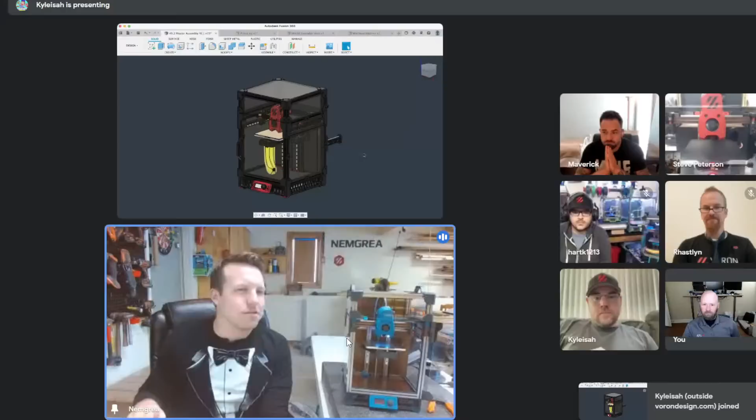The top hat is different. We moved to an extrusion-based top hat, away from the printed one. So it does use new panels, but the benefit is that they are all square, very easy to cut. Now if you want a taller top hat or a shorter top hat, you just change your extrusion size. All the printed parts are identical. You don't have to worry about trying to get someone with a large printer to print you a unibody top hat. It's rigid, and it leaves a lot of room for activities up there.

The second bit about it is that it is hinged, so it comes on and off very easily. It makes it way easier to work on the top of the tool head, or your AB drives, or doing any sort of maintenance on the top of the tool head or the top of the printer, now that it flips up and down like that.

We have some stops on the back of the hinges, so it kind of keeps it at the workable height, I guess, without bumping into your spool holder back there. And then the other kind of exciting part about the top hat is that...

When it closes, it actually locks. There's some little cam locks right here, and if you will do me the honor, I can share this little video we got going on here. That'll kind of demonstrate what happens when you lock or how to open and close the cam locks on the top hat. They're a little 90-degree turn of these printed parts. Locks and they lock onto some button head cap screws that are coming out of the bottom of the extrusions.

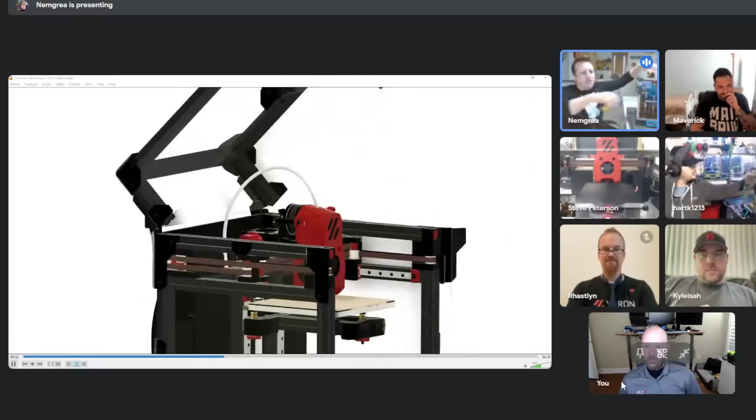Locks them on and off. You can see there the hinges on the back that have some stops built in to keep the top hat kind of up in place there.

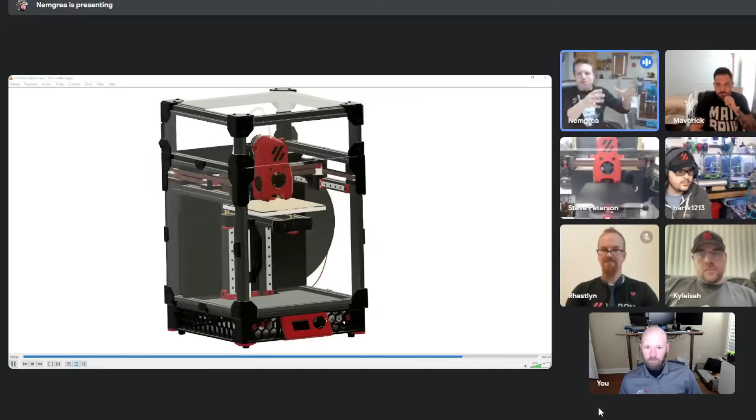That works really good. It's even just when building it to begin with, the being able to take it on and off is just infinitely better than the old solution. I know a lot of people weren't even using the screws to hold the old one on. They just keep it on and then pull it off and on as they went. Now you can do it both ways, and it works really good.

The other bit is that it does lock it down pretty good. I mean, you can give that thing a good lift, and you don't have to worry about it ripping it off or anything. It's pretty sturdy. So that's the new top hat.

Pretty okay. Let's move on, I guess, to the next bit. After the top hat, the other large update to the printer is obviously the tool head.

It's pretty large. So you can see it here. I think, Hark, you got even a large version there, so we can really get in and see all the details about it. But we'll just start with a kind of a rundown of what changed about that.

The first thing is that we've moved to the 20 millimeter pancake stepper motor. I know a lot of people are already using that. It just has better heat management than the older one, and a little bit better torque and whatnot. That wasn't always a huge issue, but beside the point, we're moving to that 20 millimeter motor.

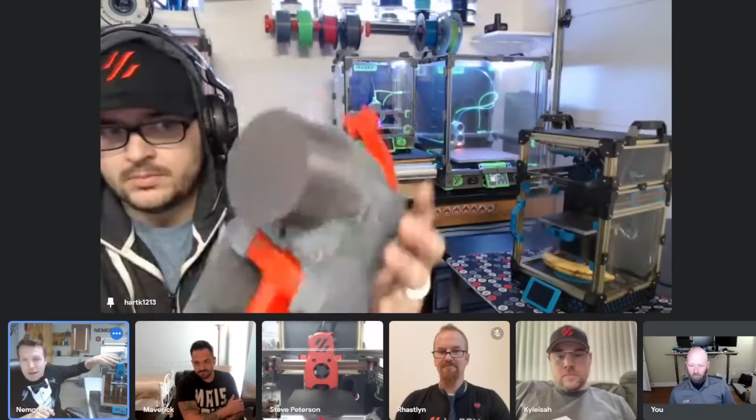We've also redone the whole filament path. This was kind of all piggybacked off of the Stealthburner upgrade. We made a lot of changes to the Stealthburner tool path. We pulled some of those ideas over into this tool head. The couple of notable ones are that the filament path is not curved anymore at the top. It just comes straight out. It makes assembly and feeding a little bit easier.

We've also opened up the hole, essentially the filament path hole that goes all the way through. I know a lot of times people would have to use that 2 millimeter drill bit, clean out the thing, before you could put your tool head together. We haven't really had to do that much anymore. We've opened that up enough to allow it to just print and be functional right away.

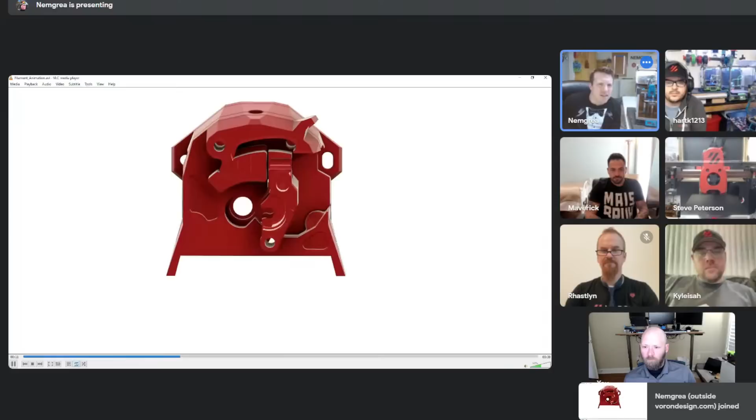I also have another little video showing that I can share here. So this should kind of give a little interior look at the filament path. So you can see it just comes straight down the hot end like that, and you can see that right where it exits, where the gears would be, there's these little extra lobes, I guess you could call them.

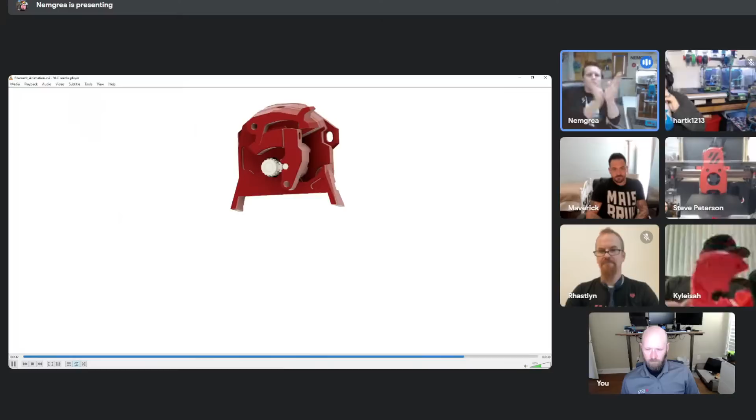That's taken straight from the Stealthburner tool head, and that basically allows you to feed the filament in a lot easier. It'll kind of, like a funnel, right? It catches it and it'll guide it right through, so you don't have to be quite as perfect with how you're trimming and cutting the end of the filament when you feed it in. It makes just filament swaps or general use of the tool head a lot easier.

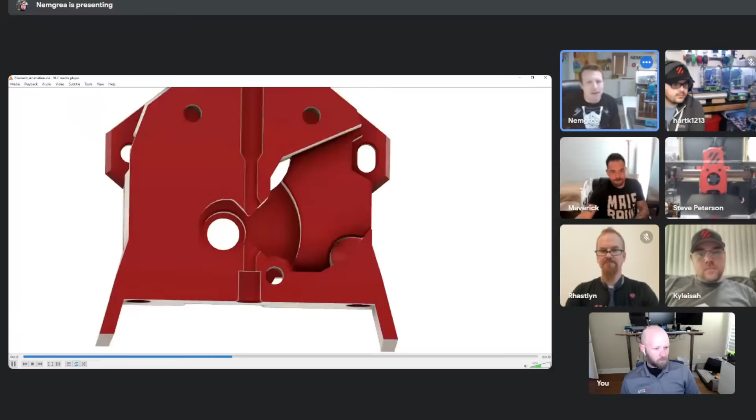The other thing you could probably see based on this animation here is that the tool head has three pieces, right? The cowling, the mid body, and then the motor plate there. I know on the mini afterburner, you kind of had this motor plate that was mounted permanently to the X carriage. And then you'd kind of have to, like, if you wanted to take your tool head off, you basically had to pull the whole clamshell thing apart, and it kind of spilled over everywhere.

You don't have to do that anymore. The whole tool head can be bolted together, taken on and off the printer using 2 bolts in the front, and one that comes in through the X carriage from the back. So those 3 bolts hold the entire tool head to the rest of the printer. Just undoing those 3, you can pull the whole thing on and off. You don't have to split it apart at all anymore.

You can keep all the internals in there together, if you need to pull it out and do maintenance, look at it, or change a fan or whatever.

We've also opened up the side of it here. There's a bigger window in the side, which allows you to actually see the gears now. You can look right in, you can see the filament path, you can see the gears that are in there. So it's really easy to look in and say, oh, my filament's not feeding right, or my gears are misaligned, or whatever. It's easy to diagnose those issues without having to essentially take the whole thing apart and understand how it's going to go back together later. You can just look at it and see, hey, I've done something wrong, or no, everything's good.

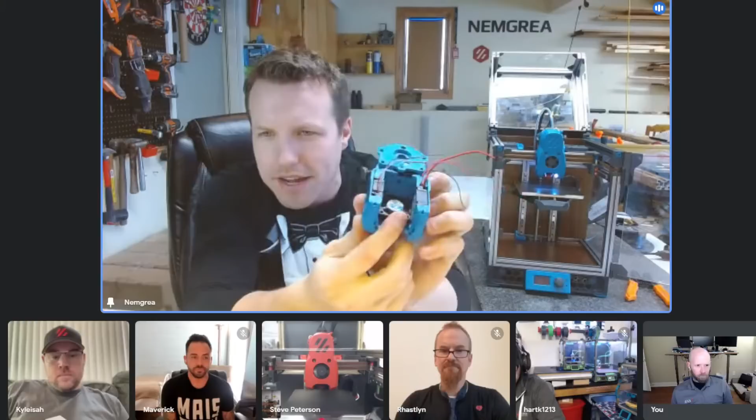So we've had really good luck with that. The other bit that goes with that 10 millimeter fan is, you'll notice here I don't have a hot end in this one, and you also might notice there's no bolt pattern in the bottom of this cowling. That's because, dissimilar to the Mini AB where each hot end used its own cowling, we've done away with that. Now all of the hot ends that we support right now use the same cowling, and instead they mount into a little mount like this. Different mount for each hot end, and then that hot end mount just slips in from the bottom, and the 2 front bolts here hold it on.

So that allows you to change your hot end out if you need to, without having to pull this whole thing apart to try and get bolts in the top. You don't have to do that anymore, it mounts right up from the bottom. It also means that the length that this PTFE tube sticks out the top is the same for every hot end. So you just have to stick it in there, measure that to height, and cut it.

And we have a tool for that. There's a whole jig, Kyle's showing it off right now. It's a nice little jig that makes all that a piece of cake. I can show our other little video here of the hot end mounting.

Oh, did that one flip over?

There we go. So yeah, you could see the hot end just slips right out the bottom. So actually, you could change out your hot end without even taking the tool head off the printer if you really wanted to. That might be a little bit tricky, but I digress. It's possible, and it also makes the assembly a lot easier.

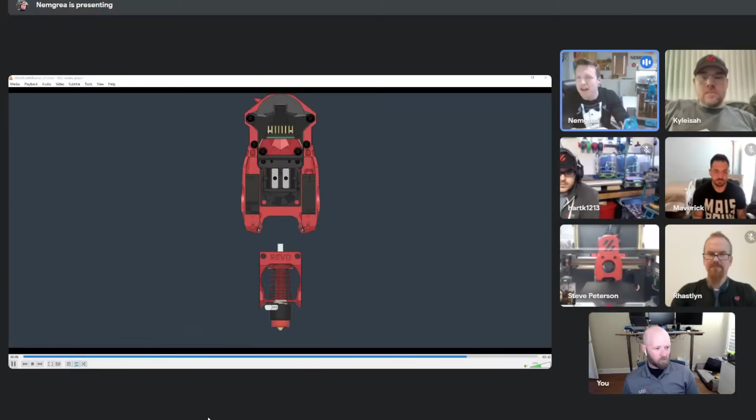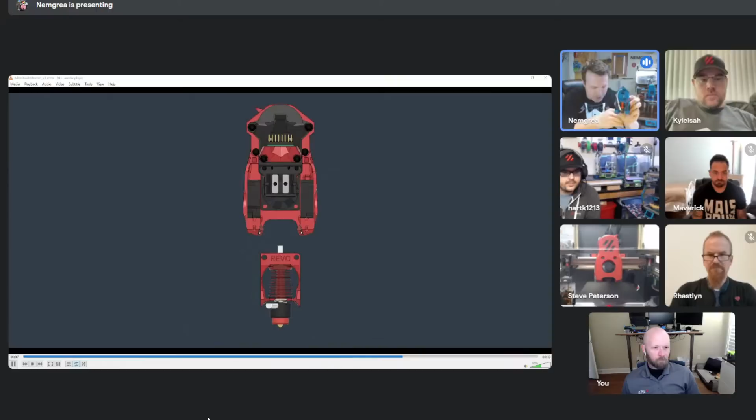The other thing it does is it incorporates the fan saver. A lot of people have issues with the blower fans being susceptible to hot end heat. I think it was, and forgive me if I butcher your Discord username or your GitHub username, I had it written down in my notes here as JAPPAJ, J-A-P-P-A-J. He made the fan saver mod for the Afterburner, and so certainly was the inspiration for us including it in the new mini Stealthburner tool head. So a big thanks to him for that sort of stuff.

The other bit that we've included in here is there's more room for the 50T Bondtech gear. We went through this with the regular Stealthburner, where depending on who you buy your gears from, there is a surprising amount of variability between how big the drive gear is, how long the whole shaft is, where the 50T is on the shaft.

Depending on who you buy it from, there's a lot of variability in that, and that would cause people issues quite frequently on the Mini Afterburner, where they'd put everything together and that gear would rub on one of the printed parts. So we've expanded the gap that gear sits in, so it makes putting it together a lot easier, as well as how I stated before, where you don't have to clamshell it on and off the printer, so you can just put it together. You can see if it's rubbing just in your hand by looking at it, and how it sits there is how it will sit when you're on the printer. Again, just ease of use, ease of assembly, really the big push for most of these upgrades.

So one question that was posed, and I think it's a fair one, is what are the supported hot ends for this setup at launch? Sure, yeah. So obviously, as you've seen in the animations, the Voron Revo is a supported hot end. We also support the Dragonfly BMO, which is the one that Phaetus makes, and then we have the Dragon hot end, both the Voron edition and the regular one, same mounting solution for both of those, and this is also available in a high flow version for now.

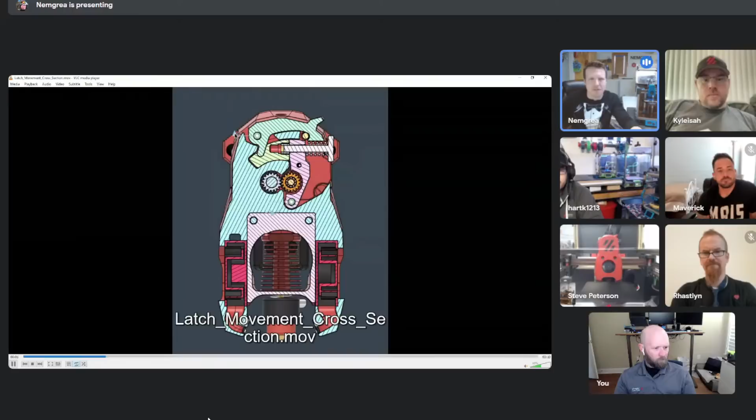I can stop sharing this video. So yeah, a little M2 self-tapper screw goes in there, and that just gives us a little more strength because that thing prints on its side, so it gives us a little more strength in the layer adhesion direction to improve the rigidity of that part, since there is, when you crank down that tensioner screw, a lot of pressure on that part, which will keep it from breaking, essentially.

The other thing, obviously, with the new tool head, it does mount with a new X carriage, printed X carriage, which is a little bit thicker than the old one, so it should be a little more rigid. I just actually got my ADXL sensor set up last night, thanks to some help from some contributors, and ran some good graphs and actually had fantastic results in the Y direction, which was kind of one of the spots that people could struggle with on that older X carriage. It's a little thinner in certain spots.

We've had that beefed up one pinned in the V0 questions channel for quite a while that I know a lot of people use. This one's thicker even than that, so it should really help with rigidity of the tool head.

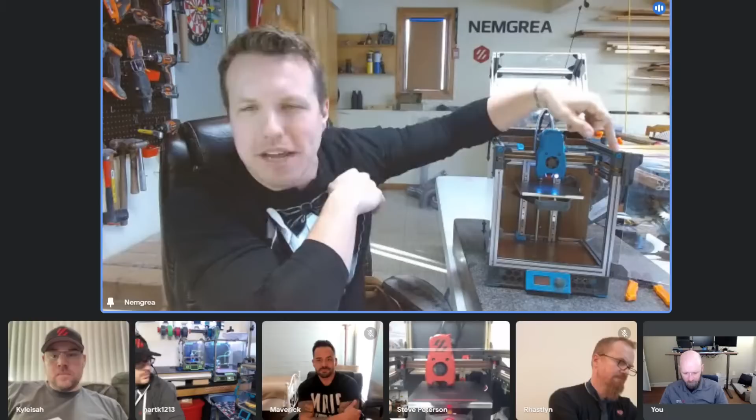So as we're working through the gantry, obviously we have new idlers here. So if you want the cam locks, that's a new printed part. The XY joints are new, and if you notice, I don't have the end stop block on here anymore, and that's because we are moving to sensorless homing for these printers.

So that's kind of the other big update, and the main reason for updating those XY joints is you can get rid of that screw, and it also helps because a lot of times people would leave that screw too long, and then they would lose Y travel or X travel, or end up having to bend that lever in the back to get the gantry to go all the way back.

Don't have to worry about that anymore. Sensorless homing is going to bring you all the way to your max travel every time, so you hopefully won't have to worry about people not having their full 120 millimeters of travel. That should work pretty good.

There's a couple of really good guides out there. The Klipper guide is information heavy, obviously, as Klipper documentation tends to be. A great member of the community, Clee, has made a focused version of that guide that we'll have links to for setting that up. It's a little more technical, obviously, than a mechanical switch, but I believe in you all.

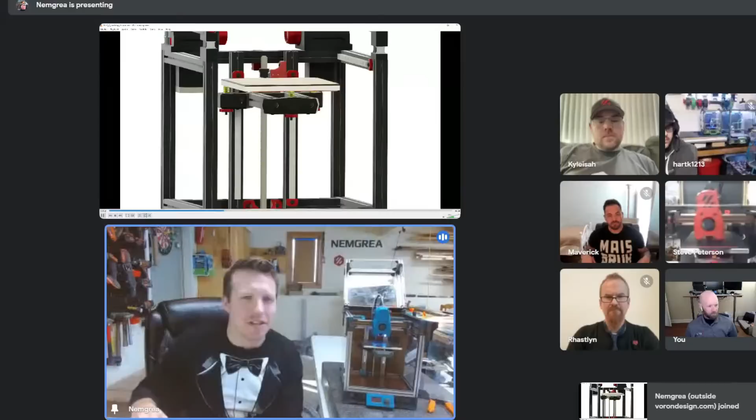It's just one number, and if you want to change it up or down, you can go in your config and change it up and down. It's very intuitive, very easy. I have a video kind of showing that too, it's all stuff that I've talked about here, but if you're unfamiliar with how the old printer homed, this will show it and show the difference, how it's going to Max Z instead.

So that's it. It also makes the wire routing a little bit easier for that end stop. It just pops through the deck and goes down to the bottom, by the board, or to the back of the board. You don't have to loop it up and around the motor panel anymore. That business is done as well.

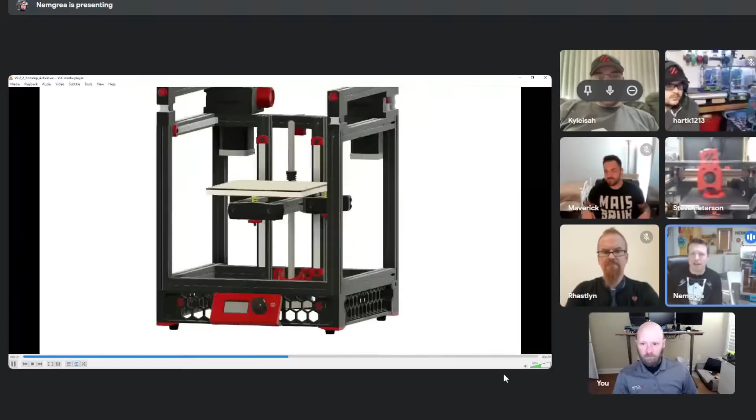I know Steve's been running this Z endstop situation for quite a while, about as long as I have. Is it fair to say, Steve, that we were both healthy skeptics to begin with? Absolutely, and this is the better way to go for the V0. Yeah, the tuning is so much better, and the configuration window is so much easier to deal with. And that's the biggest thing.

Messing with your first layer height stuff, having to worry about whether you're going to run into the end of travel on that end stop, that's not even an issue anymore. It's completely off the radar now. So that's super nice.

Let's see, what do I got next on the list here? Skirts. The skirts are different. If you'll notice down here, these are similar to the Trident skirts, I believe. Forgive me if I haven't doled out credit properly, but I believe the first time I saw these was from a Discord user, MCM Ben, and I know he had done a V0 Trident skirts mod, and Maple Leaf Maker had done another one. I'm not exactly sure what CAD was started with.

I know Steve did a bunch of work getting some CAD cleaned up and sent over to me with small changes and whatnot, mostly around the inlet back here to get our new skirts working. The other large change, obviously, is the display on the front.

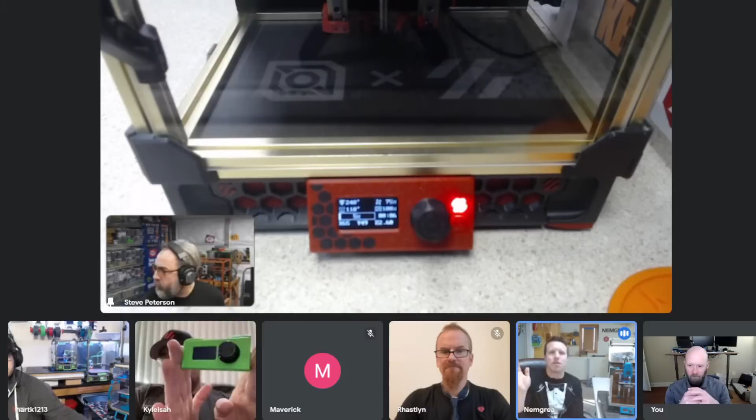It's a normal V0 display, I suppose, made by Timmit. The PCB and the plans for that have been out for a while on the hardware repo, but that's incorporated into the skirts now. If you don't want a display, there's a blank skirt piece you can print as well. That should cover all the bases for that.

It's also got, I don't have it on, but it's got a rear skirt now, so there's not a big empty area in the back. We'll see if Steve and Kyle will spin their printers around for us. There we go.

Mine has an external power supply, so that's why the inlet's weird. But sure, same inlet. Steve's got the stock stuff, and Steve's also doing a good job of showing off the first panel change we made, which is that we've moved to a split rear panel.

A lot of us like to just leave this electronics area open. Having this little extra split piece up here allows us to close off the rest of the build area, keep that chamber nice and warm, but still have access to the electronics area. I have the rest of my back panel sitting around here somewhere, you can bolt it on if you want. Mine's set up with the split panel, but I have a very truncated rear panel right now on this printer. There you go.

And there's also now a bottom panel. Steve likes that. The next one, we have a bottom panel now.

That mostly came about from, I don't remember the Discord username, but we had a gentleman or a lady who opened a helping or engineering ticket with concerns about the separation of mains power and the ability to accidentally electrocute yourself to death. So we took some of their suggestions and incorporated them here. The bottom panel was there already, that was the inlet at that point, yes. That person didn't know about that obviously yet, because that was our little secret, Steve.

Yeah, but so it's a lot harder to get your fingers caught in the danger bits, which is always good. The last couple things here: the major, I think we've covered on the gantry, is that the idlers are new, the XY joints are new, and all the panel clips have gotten a little bit of a stealthification, so those are technically new as well.

The only parts that we didn't touch were the motor mount, the Z motor mount down here, and then the tensioners and the knobs.

So that's a super exciting upgrade. I know we've kind of lagged behind the Bowden game since V0.0, so there's been a couple people that have poked me and asked, hey, when are we going to get a Bowden version of the Mini Afterburner? Well, we just skipped it and we went straight to Mini Stealth for the Bowden.

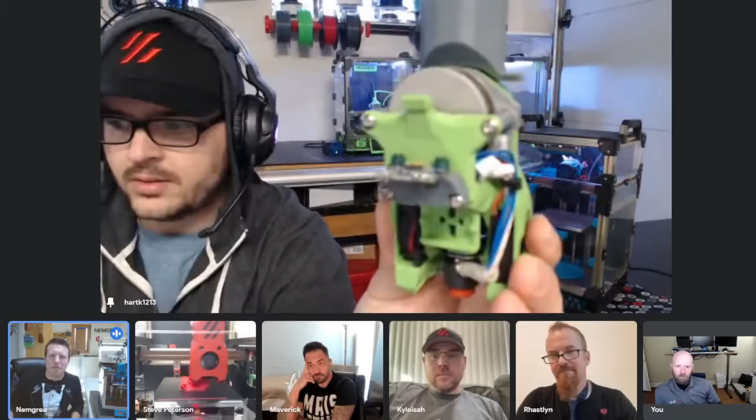There you go, so that's the answer for that one. The other thing is that we do have - I don't know if I have mine sitting around here because I just did it last night - but we do also have ADXL mounts. There we go, so they mount to the back. There's a plate kind of on the back of the tool head here that does all the strain relief and helps with the wire routing. And the ADXL mounts right to the back of that. So if you want to automatically tune your input shaper, you can do that with ADXL mounts.

I believe you, Maverick, made mounts for all these same boards that we currently support on the Stealth Burner. So any of the bolt patterns that are available for Stealth Burner, we have mounts for those same center to center distances between those holes. That's right, so that's also going to be available at launch, which is pretty awesome.

I never did input shaper before. Ran it last night and pretty happy with my graphs.

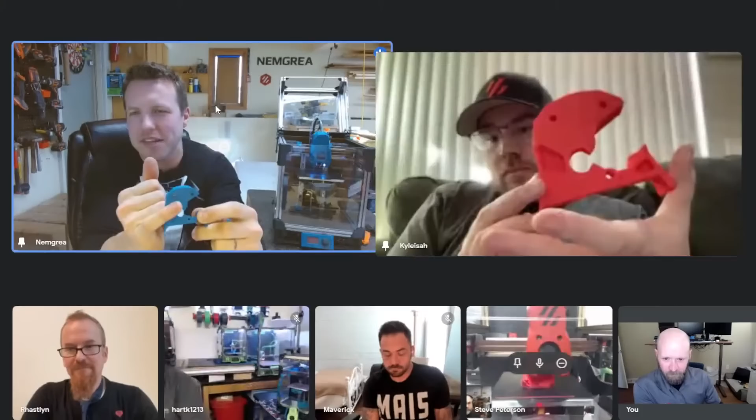So you can see the mid body here is all solid. There's some little pockets here that just help you clip it together, similar to how the RCF does a lot of his parts where they snap together real good. So if you guys want to jam your sensor right into this upper area, be my guest, there should be room for all the activities that you want in there. Like I said, CAD will be available, and I know you guys do wild stuff that I never even imagined.

Okay, good. And then kind of a group related to the rail size and carriage for the X rail. Sure, and along with that, XY joints and AB drives. Maybe just go over that one more time, please, on the spec hardware and any changes there.

I think part of what he's getting at is it's all MGN7 right now. We haven't done like we did for the 2.4, bumped the X carriage to a different size and spec than what has previously been used. Is that fair from what you've seen, Rhastlyn?

Yes, so we did not, all the motion components are the same from the old V0.1. The rails are the same size, the belt path is the same, the bearings are all the same. I do know some people in this thread, especially those involved with printers that use 9C rails, will have you covered if you'd like a 9C on your X.

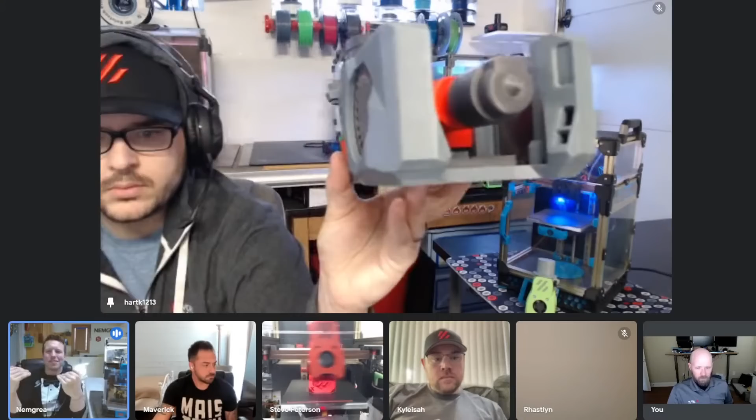Hart's doing a great job of showing off how the ducts are angled there, and that actually gains us, I believe, about 4 or 5 meters per second increase in speed for the air right at the nozzle tip from the old setup.

So people have asked, compared to the jump from Afterburner to Stealth Burner, that was a pretty good jump in cooling. Obviously they have a lot bigger fans and more room to work with, so the jump isn't quite that big. It's not crazy, but it is better.

We did look at that and tried to focus some energy on improving that cooling as best we can. If you're going to print PLA, you still probably got to do it with the door open and the top hat off. You can't cook the stuff in there. There's only so much speed you can have with fans of that size and the space we're working with.

We didn't want to change the frame and make people buy new frames. We didn't want to lose X or Y travel. So those were some of the design goals that we just weren't going to compromise for the upgrades. If we can work within that and do as good as we can on improving the cooling, that's what we tried to do with the new tool head.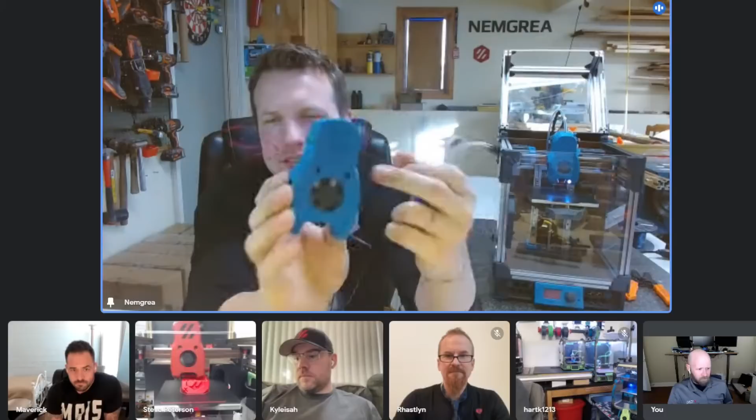The Rapido tool head is almost exactly from the nozzle to this top surface - that tall. And the problem is, obviously, you need some amount of plastic up here to put screws through. So with this cowling, the one that supports all the other hot ends, there's just not enough room to fit the Rapido in there.

However, like I said, CAD is going to be available. If you want to stretch this tool head down and stick the Rapido in there with a mount, totally doable. You'll lose a little bit of Z, but you get your crazy banana flow hot end. So that's one we tried to fit stock, but it just needed a whole new cowling and a whole new mount.

It's one of those things where we're trying to keep the flow chart of what STLs do I have to print obvious, right? When you get on the Discord or on the GitHub, you don't want to be like, well, do I need this one and that, what combination do I put. We're trying to limit some of that confusion.

So I'm 100% sure that someone will mod that tool head to fit a Rapido, and I welcome it. Go for it. Load it to the user mods, point people towards it. That's an awesome hot end.

Which also brings up the other bit that I almost forgot about, but I'll show off - I have it closed now too. Now I gotta go... do you have it open, Maverick, or no? Don't, hold on. Oh, I got it up here. Got it, give me one second. There it is.

So that's something I noticed a lot. We'd get questions where people would ask what parts do I need to print, or which part is this, or what parts can I print out of PLA. Most of the time, people would link over to one of Doc's PIF lists, and a lot of times those lists are very directed towards just the PIF suppliers, what they need to know for getting kits out to people. Maybe a little different than what your general builder would need.

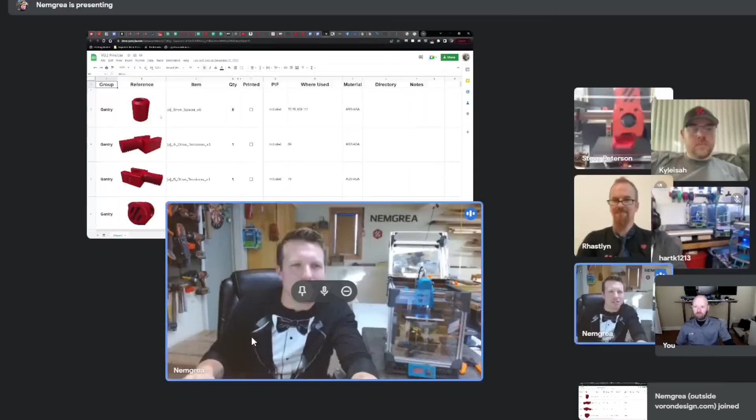So we put together a spreadsheet that shows you all of the parts. We've got a picture of every printed part that'll be in the GitHub repo, where they're used, the group like gantry parts, and how many of them you need to print. Again, this is all stuff shown in the file name, but for people that missed that bit in the manual, we've made it real easy here.

We've also shown you which parts the PIF will include. If you're getting a PIF kit, this part is included, this one's not, so you know what you're responsible for, and you can check off, all right, I printed this one. Click it, go for it.

You'll have to download a copy of this spreadsheet once we push it. We've also listed where each part is used in the manual, so this part shows up on page 70, 76, 109, and 111. So if you're looking at a page and don't know what that part is, or missed its label, or can't find the file name for it, you can jump here and find that.

We also list the recommended materials for each part. At the bottom of this document, you'll see panel clips can be printed in PLA, or you can print your skirts in PLA if you want. We still recommend ABS for everything, that's what they're modeled around, but if you're happy with a PLA skirt or panel clip, go for it.

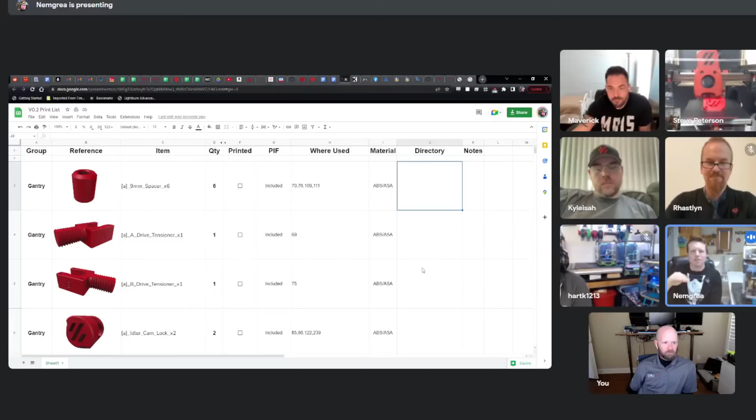So that was a bunch of work that Maverick and the guys put in to get this nice spreadsheet set up, so people can download it, have a local copy, and mark stuff off or do whatever they want with it. A good list for keeping track of what you've got.

We're going to come up with a couple more questions so Steve's cube can finish here. About halfway through. Go ahead, no, I was just going to say the cube's about halfway through, so keep the questions coming.

Someone on YouTube asked about tap support. There's the Boop, which is coming for the printer variants that work with the Mini Stealth Burner, but it's not going to work on a V0.

Yeah, you sped over that pretty quick, so I'll help fill it in. There's a group of people on Discord adapting tap to the Mini Stealth Burner toolhead, and they've affectionately nicknamed the project Boop. However, the big caveat is that it's not compatible with the V0. It's compatible with some other printers, like the Micron, which have more room in the Y direction, because it thickens up the carriage and back of the toolhead considerably. So you'd lose a bunch of travel on the V0 due to incompatible gantry stuff. So yes, something like that exists, but not really for the V0 - it's mostly centered around these printer-for-ants offshoot printers.

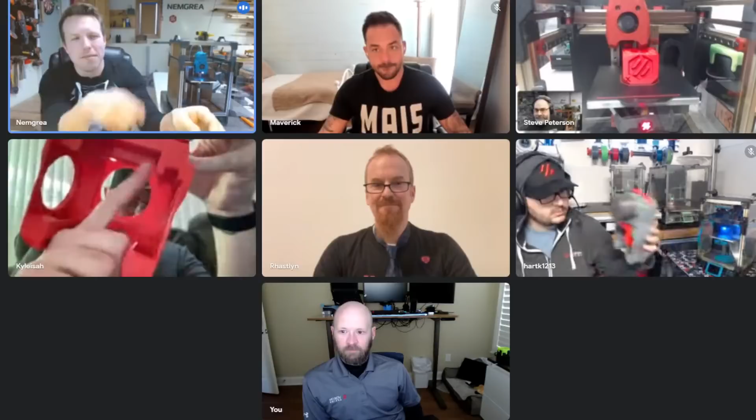The question was asked, since we were talking about RepRap festivals, if anyone will be at the Sanjay Mortimer RepRap Festival in Oxford, December 2nd through 3rd, Oxford, United Kingdom, 2023. And the answer is hell yes. I know I'm going to be there for absolute certain. Several other people I have encouraged to also attend.

For us here in the States, trips across the pond are maybe not the easiest thing, but we have a very dedicated crew over in Europe who I'm sure will be gracing us with their appearance in Oxford. If it's possible at all for you guys in the community, please consider coming to the Sanjay Mortimer RepRap Festival in Oxford, United Kingdom, December 2nd through 3rd, 2023. It will be a phenomenal time.

Through the grapevine, I've heard there's going to be some really cool stuff shown off. Even just having been announced recently, there are so many people in the community who Sanjay had impacted their lives that they want to do something to give back, and use the opportunity to show off stuff that they feel he would have thought was the coolest stuff ever, because he was one of us guys, someone passionate about this. So yes, we'll be there. I encourage you, if possible, to be there, and I'll shut up on that.

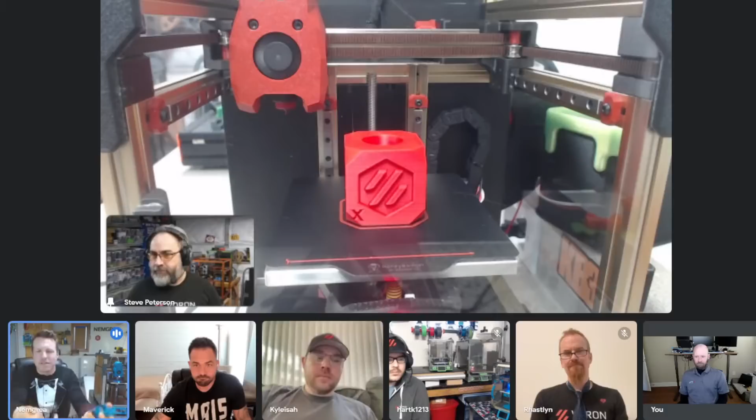That was one of the biggest things - fixing the filament path and making this easier to take on and off without disassembling the entire thing. You don't have to pull this thing apart, catch parts as they fall out, or tip it. You just pull it off, work on it, then stick it back on. You don't have to undo your belts or anything to change off your tool head. It should make that stuff a lot easier.

On top of that, that goes into upgrades we made to the manual. There's a lot of steps in the old manual that are implied steps or things that maybe we as designers see as obvious - 'of course people will do this, that's how you do it.' As we move through it, and as you guys open GitHub issues and make us aware of where people are falling into pitfalls...

I think we've done a really good job of shoring a lot of that up in the manual and in the design. It'll be interesting to see the first wave of GitHub issues to see the little things we miss here and there. I'm sure we'll have an STL that's upside down or something - there always seems to be one. And some spelling and grammar stuff in the manual, I'm sure.

But I know just from the feedback we've gotten from a lot of the contributors and a couple of the other people on the dev team working through the manual on an actual build, is that they've been pretty happy with the improvements we've made.